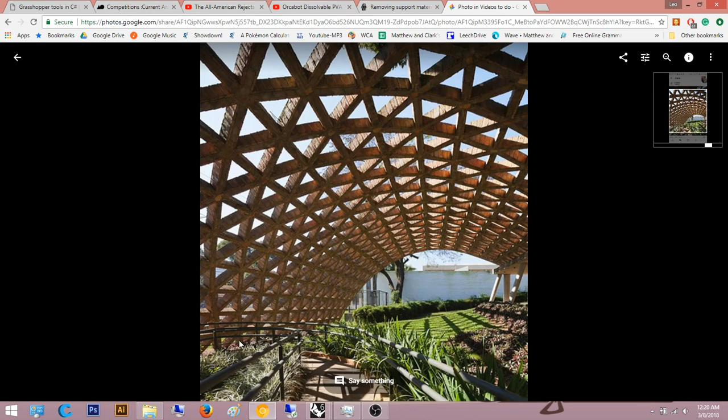So it's this, what's it called, a pavilion type structural member. I usually try to find some basic shape when I do parametrics. I know immediately this is a triangle, and from experience, a bunch of triangles creates a hexagon, and there's a hexagon or hexagonal command in Grasshopper. So I can use that as my base point, and now that I know that, I can start to model this.

Right, let me pull this up. All right, cool, so we're going to start with this. So I haven't even opened Grasshopper yet. Silly. So while this opens up, I'm going to talk a little bit more.

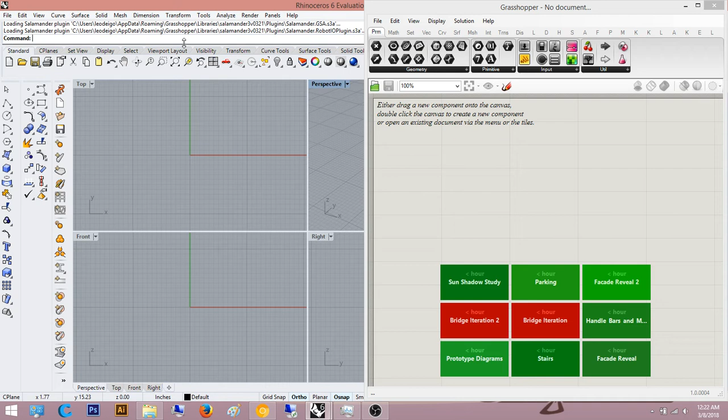Wow, that is out. So we're going to work in top view for this one, I think that'll work the best. What I'm going to do is work in a plane first, and then I can do a surface morph onto a surface I create in Rhino with this. So that's how I'm thinking about doing it. I'm going to have that picture up for reference.

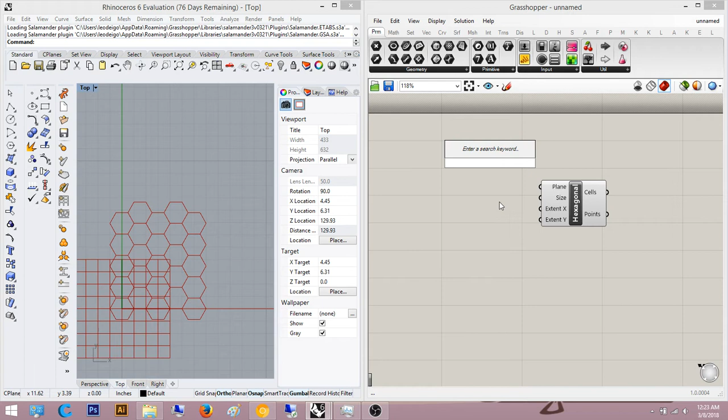So how I'm going to start off is the hexagonal, like I said. So we're going to start off with the hexagonal, so it creates this amount. I'm going to actually make it a little bigger, not the actual size, I'm going to make the size a little bigger. So 5 radius. There we go, and I'm going to add more of them, probably.

I always do 12 because if you type in, let's say 9, it'll only go up to 10. If you go 11, you can go up to 100. I always do 12 though because it's an even number, and I don't know why, it's just the easiest to pick out for me, maybe because my finger is already on the numpad, or I do 1, 2 instead of double clicking twice, so it just flows better. I don't know, personal preference.

Oh sorry, I just dropped my phone. I just hit it actually, sorry about that.

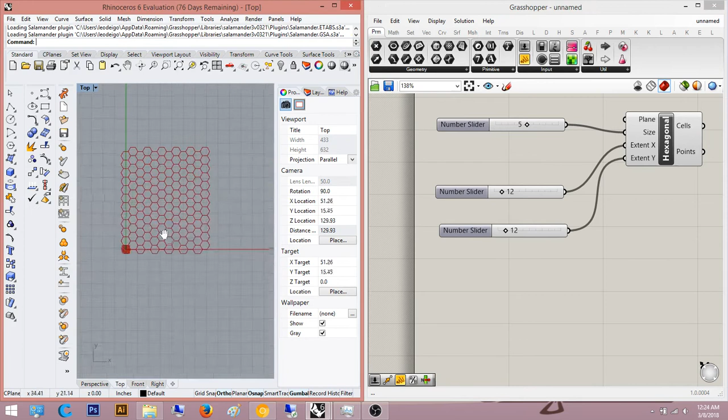So for extent X and extent Y, I'm going to put in 12 because I may want to change these up. Since the pavilion is a little bit longer this way, I'm going to make that a little longer. Alright, cool, so it's like a 20 by 13.

And now I am going to start with the grasshopper. So I'm going to do an explode immediately, exploding the cells, which is going to give me some segments and some vertices. What I'm going to do is use the vertices and draw lines that intersect this way, this, and this. So let's try that out, and probably the whole perimeter as well in general.

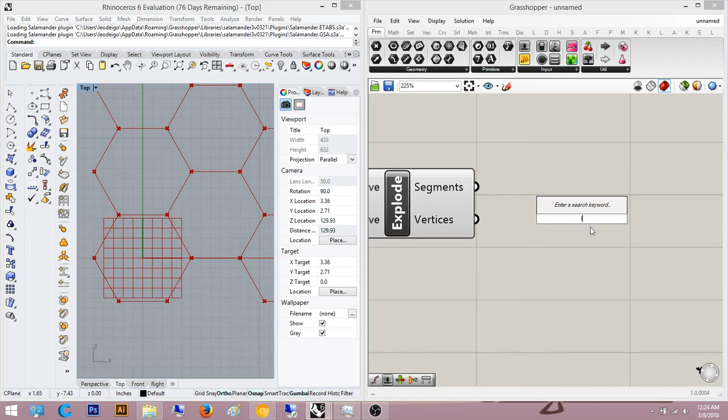So let's do a list item in general. I'm going to do a list item, and I do 1, 2, 3, 4, 5, 6 sides, so I'm going to copy and paste. Now if you're learning how to do this, I would recommend typing them all out. I know that seems stupid and redundant, but it helped me learn Grasshopper a lot easier just to understand the commands and how it works and get the hang of things.

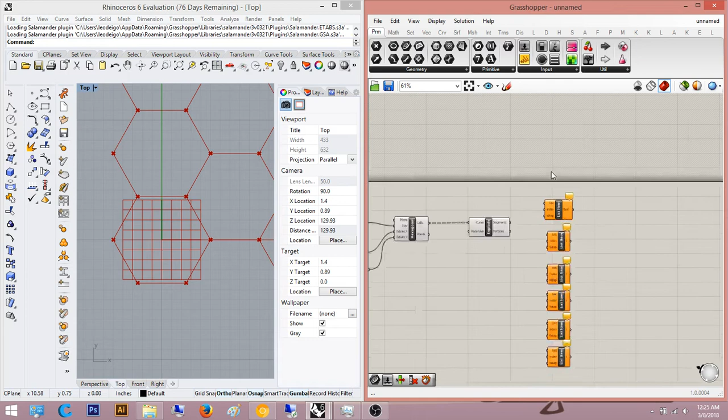So we're going to start with the segments and just throw up a list. Actually, before we do that, I noticed that if you have wires that are dashed, it means it's partitioned in some way, whether grafted or partitioned. If it's a wire like this, then it's not partitioned or grafted, it's just flattened basically. So this is partitioned into 12 or 13, whatever this number is, 13.

So let's do a list, and I'm going to throw all these in there. It's going to be 0 through 5 because 0 counts as a number: 0, 1, 2, 3, 4, 5.

Also want to apologize for the noise in the back. My 3D printer is running right now, so yep, sorry about that. So 0, 1, 2, 3, 4, 5.

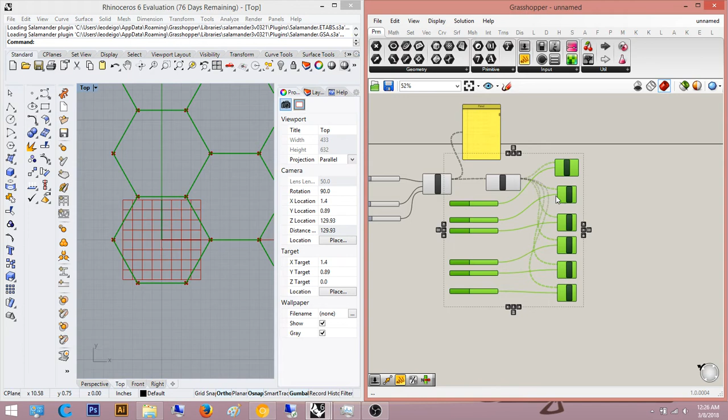Alright, so I like to keep my scripts pretty organized, at least it's a good habit to. So I'm going to group all these. So that is segments, and then now we're going to do the vertices.

So actually we can just copy and paste it again. So that's 6, I think. Yep, that's 6. I did it 6 times. So 1, 2 - oh, I plugged that one in the wrong one. Control Z. 1, 2, 3, 4, 5, and 6.

So then I'm going to align these, and then I'm going to use these same numbers here. Actually, I'm going to ungroup this. Oh, nope, I just double grouped it. If you right click, also if you want to ungroup something, you click on it, right click, ungroup.

Easy peasy. Take this, and I'm going to put this in the center of it, or around, and then I'm now going to group these 6 and these 6. Group. And I'm going to plug these in: 0, 1, 2, 3, 4, and 5. Nice, alright.

So now that we have that done, now that we have all the points labeled and all the segments labeled, we can actually start to do the geometry for this. So the geometry is basically that triangular shape along with the actual edges of the hexagonal, or the hexagon, sorry.

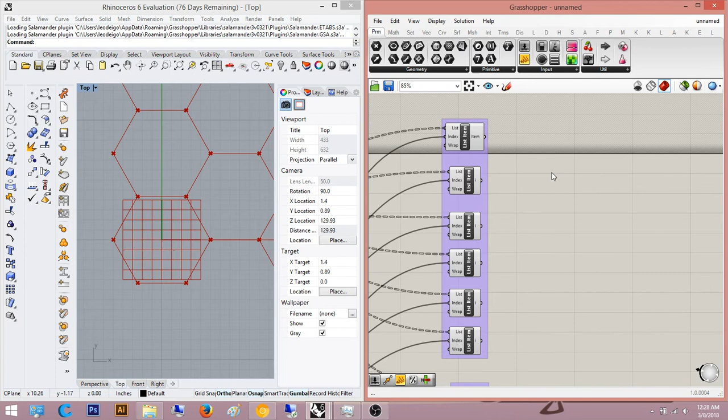So what I'm thinking of doing is I can technically join all these lines together and create my own - what is it called? My own sweep. That's what I'm thinking of doing, but there's definitely probably some better ways to do that.

Right now I'm probably going to take these points and draw a line first that intersect like this, and like this. That's step 1, I know I have to do that, so okay. So I know it's this point, this point. Okay, cool, so I have those already drawn.

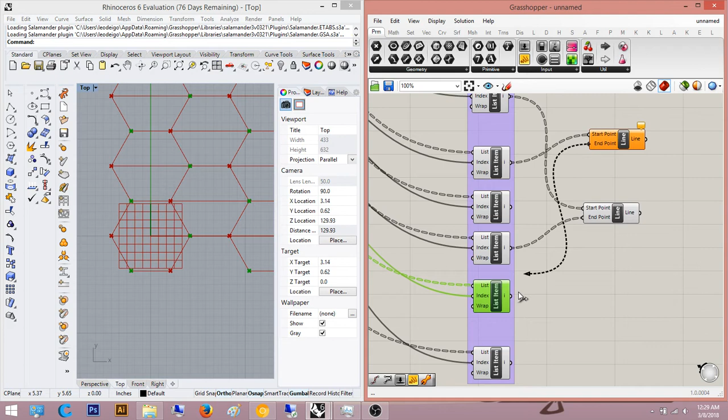And now next one, line. And for the sake of this, I'm going to copy this. Line one, and it should be this one. Yep, so this one. As you see, I'm just drawing - where's a clear example? Probably this top one. I'm just drawing a line that goes literally vertically, or straight across from one vertex to another.

Actually, I already copied it. So line, this point, and this point. So we have that kind of triad shape, as you can see from - oh wrong one, this one - from this one. So as you can see from this, I have those triad shapes now, or the triangular shapes.

So let me just straighten these out.

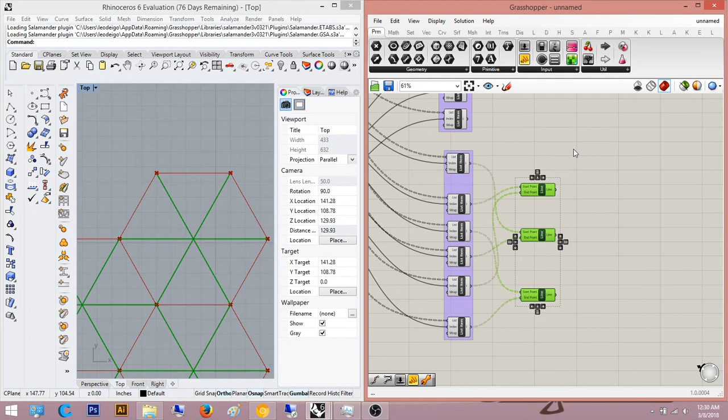And yes, you can see the clock, it is 12:30 a.m. I am up late. So what I'm thinking of doing here is I want to draw.

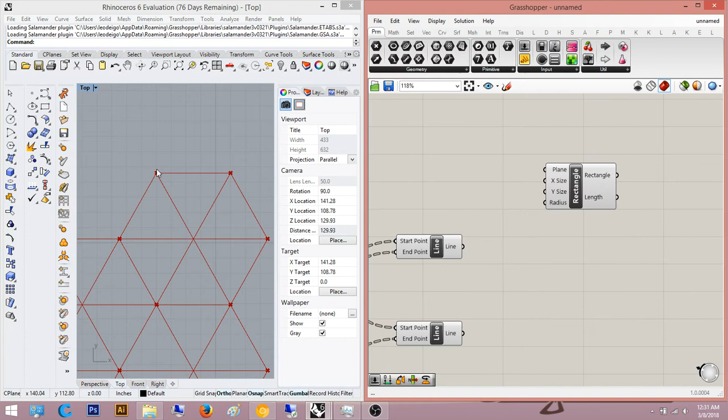Unfortunately, we can't just make a pipe and call it a day, it's super easy. What I'm thinking of doing is taking all of these and drawing some sort of rectilinear shape, a rectangle on a plane on one of these points, angled to it, so we can do a perp frame with the curve.

So we need the frame to fit perpendicularly with this curve, at parameter 1, which is the end of the curve. Yep, correct, awesome, that's exactly what I wanted. I don't even think I need to orient the geometry. Let me check in perspective. Nope, don't even need to orient it, that's perfect.

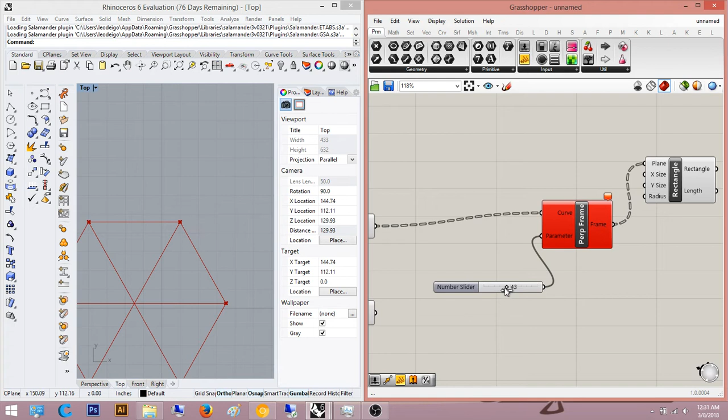Awesome, don't even need to orient it. So what I did here was I took this line and said make a perpendicular frame, make the frame perpendicular to this line. And it asked for a parameter, saying where do you want the rectangle to be. The parameters are from 0 to 1, 1 being the end of the curve and 0 being the start of the curve.

So you're supposed to set these to 1, range 1, and make it rational actually. Okay, so you can see the frame actually starts to move, and I added that rectangle.

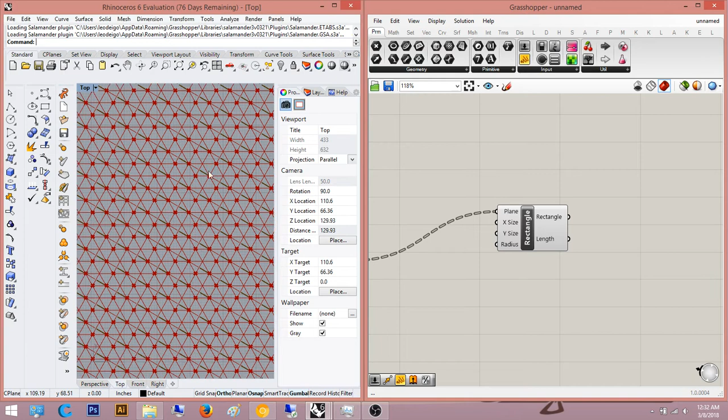But the problem with the rectangle is, if I say XY, it only reads as positive. So if you think of it as an axis, let's go back to Rhino. Why is it lagging so much? Jesus. Let's see what my memory's at. Oh, it's not terrible. So if you think about it as the axis, let's say these are your axes.

This is the positive axis. So if you say 3 feet, 3 by 2, it's going to do 3 by 2, not in the center of it. It's not going to be even 2 by 3 within the origin. So you're going to have to do a construct domain in order to create this rectilinear shape, a square in the center of it, almost a square piping. This is the way I've learned it at least.

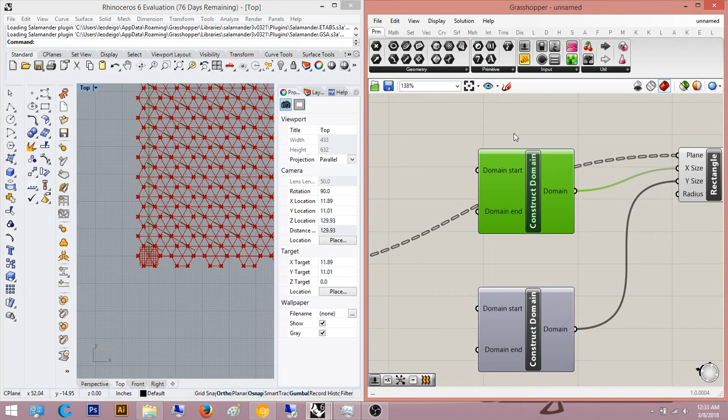So X, Y. So basically, when you do this... oh shoot, did it crash? No. Yep, it just did that.

I don't know why Rhino 6 does this. It's complete bullcrap, I don't know why it does this crap. Man, I was just trying to make a video. Wow, I guess that's part of the process. So, save your files, kids. I am not even going to go back to that. I'm actually going to go to Rhino 5 because, yeah, I'm pretty pissed off right now, I just wasted 30 minutes.

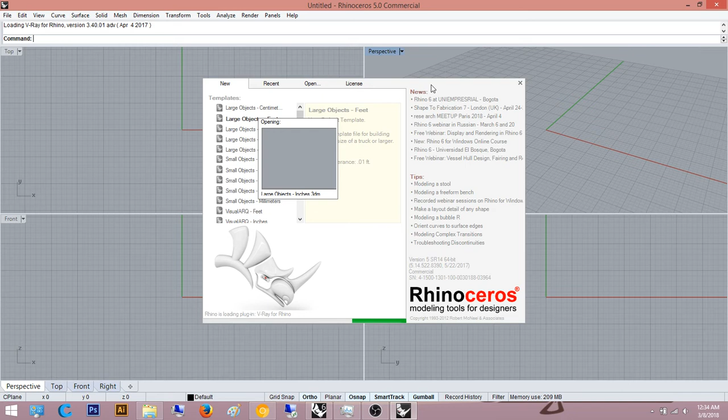I'm going to brush over briefly what I just did when I script it again, but I'm not going to go very in-depth because I already did for the first 30 minutes of this video. 30 minutes, was it? 15 minutes, no, it wasn't a big deal. Alright, cool, I only wasted 15 minutes of my life trying to record it and failing.

So I'm going to have to... man, it keeps coming up with this too. It's just not my day. Alright, close, nice. Alright, and now we can go to Grasshopper. So I'm going to use Rhino 5 Grasshopper, because Rhino 6 Grasshopper can't handle it for some reason. No clue why, just can't. I don't know, I can model in it.

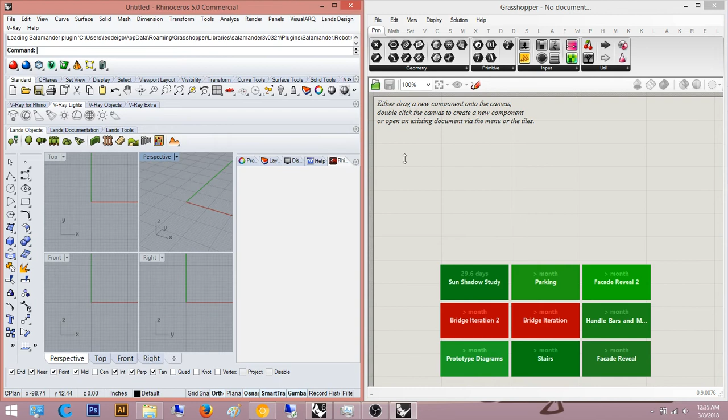I just can't do anything else. If I open up Grasshopper and start scripting, it just keeps crashing. I really don't know why it does that. So there we go, nice, nice, nice. Alright, cool. So we're going to do this again, let's try this one more time, ladies and gentlemen.

Hexagonal, and I'm actually going to type it all out, I think. 5. Copy and pasted that, it's just numbers. And I made this one a little larger. Right? Nope, made that a little larger. Yep, there we go.

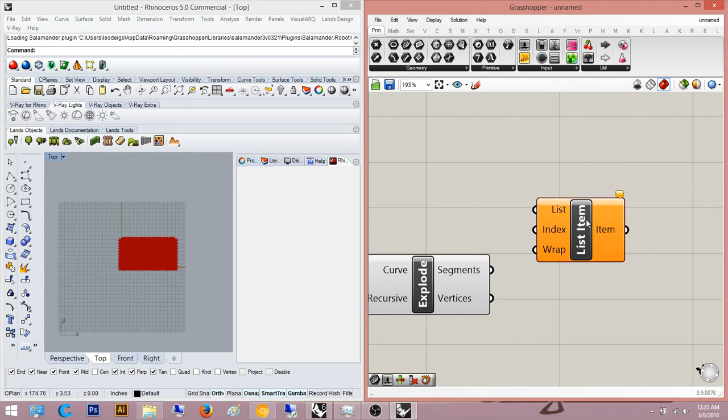And now I'm going to do an explode list item. One, two, three, yep, 6. Six of them.

Sorry about that, guys. I really can't help that. My computer happened to glitch out.

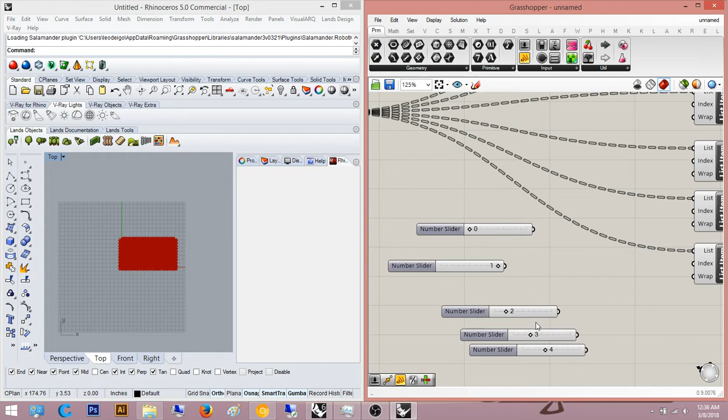I looked this up on the Rhino forums too. That's actually a problem when you use Grasshopper and Rhino 6. It just crashes, and I have no clue why. It just randomly crashes. That wasn't a heavy script either, so I'm very confused. It's just how it is, though.

No worries, though. I didn't get too far in the script, thank God. Maybe instead of plugging this in, I should have plugged this into another component, because I can't just do that. Save some time.

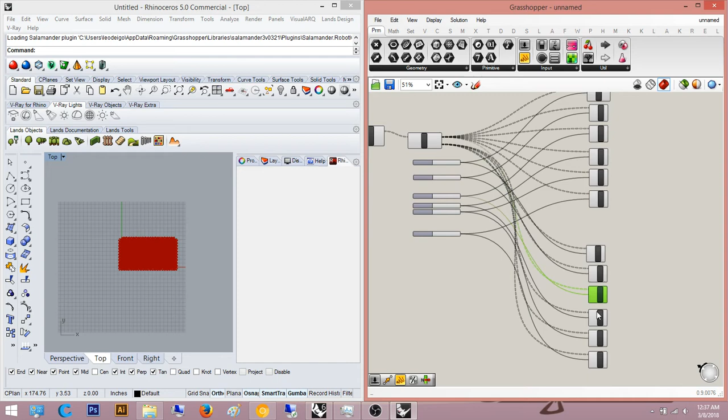Three, four, five, and six, amendo. There's still something plugged into there. What is it? Is it this one? This one? This one? It's this one. Alright, cool, they're all... alright, so we're back to square one-ish, kind of.

I still have to draw the lines. No big deal. I mean, it's a big deal, but whatever. Line.

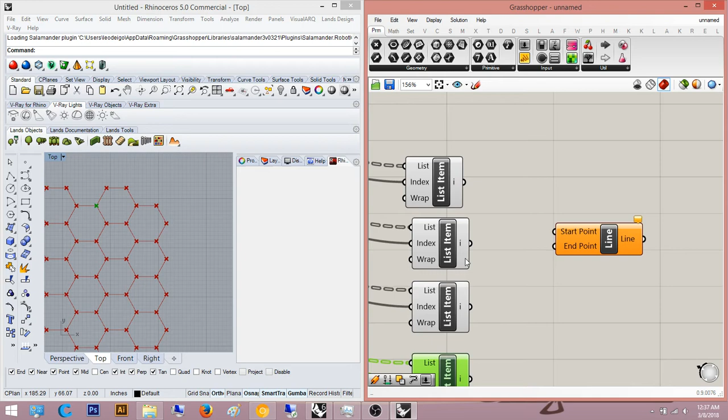So this point, or no, this one. This one, and this one. This one, and this one, and this one. And the last two, right here, right here. Nice.

Alright, so I started off here with a perpendicular frame, and this will create a frame within those lines I'm talking about. So we're going to actually use these ones, sorry. And the parameter starts from 0 to 1, so we're going to have to change it to rational.

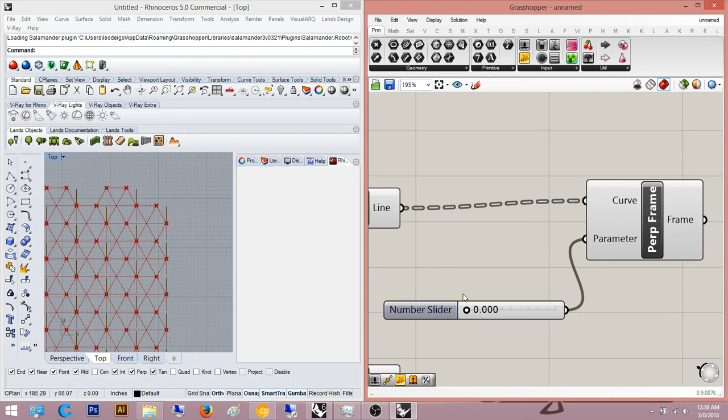Now, the reason why we're doing 0 and 1 is because the frames read - when I make a perpendicular frame, it's basically saying you have a curve, make the frame perpendicular to that curve. And Grasshopper's like, alright, I'll make that, but where am I going to make that? This is where you control where to make that. This will be like, I want the frame halfway, somewhere halfway in the curve to make that frame, and then you can start to make the geometry.

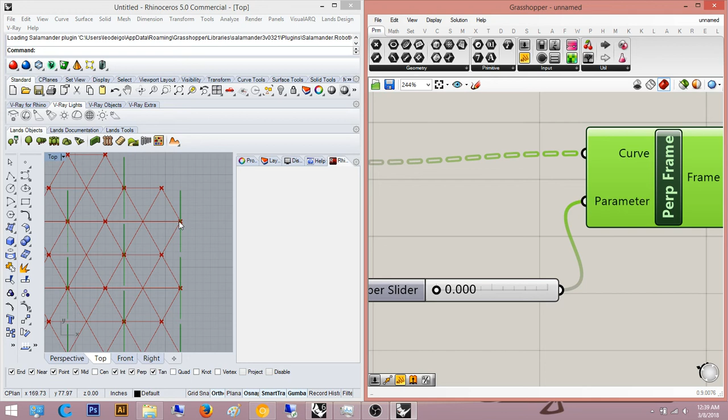I want mine at the end of the curve. You can also start at the very start of the curve, or do it at the very end. It goes from a 0 to 1 basis. So technically, whatever this distance is, it just kind of makes it into a division, like a percentage almost. So this is like 50% of the length of the curve, or things like that. Think of it like that. So I'm at 0%, which is the end of the curve, or the starting of the curve, if you want to think about it that way.

So we're going to do a rectangle, like I said before, and then what I was saying is to do a construct domain, because with how this XY works, it reads as positive. So it sees one locally defined value, -1 to 1, which means it is reading 2 technically, because it's reading -1 to 0 and 0 to 1. So that's a length of 1 plus 1, which is 2. So the length is 2 inches, or whatever your units are.

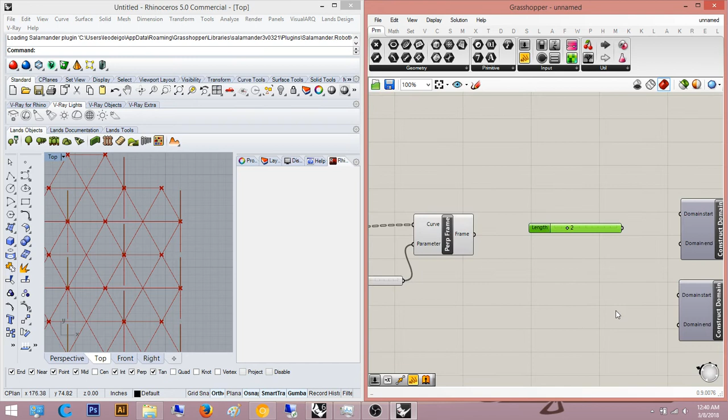So what I'm going to do is plug in a construct domain here, and we're going to make our own. So whatever this number is - let's say I want it to be 2, let's say I want the length to be 2. I'm going to actually name this length. And then I'm going to name this one width.

And then I'm going to save this file, and put this in our folder. Call it - we're going to call it Pavillion Facade. Cool name. So let's say this is my length I want it to be.

What we're going to have to do is some math and do a division, and divide this by 2. The reason why we're dividing by 2 is because technically, let's think about it.

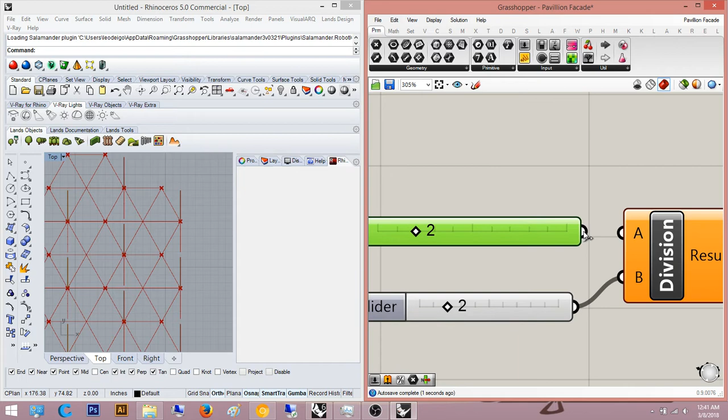Let's draw the rectangle in Rhino, like a quick one. So we have that rectangle in Rhino, right? So how is the rectangle reading off? Let me draw an example here. Let's say this is the axis it's reading off of. Actually, let's not use this rectangle, let's make another one. So right now it's reading the -1, 0 to 1. It looks something like this - let's say this is -1, 0, and then 1. I know these aren't proportional, but stay with me.

So when we plug in, let's say, just two positive numbers - let's say 3 or 4, or 4, yeah let's just say that. Or something like... come on. Say 4, 2.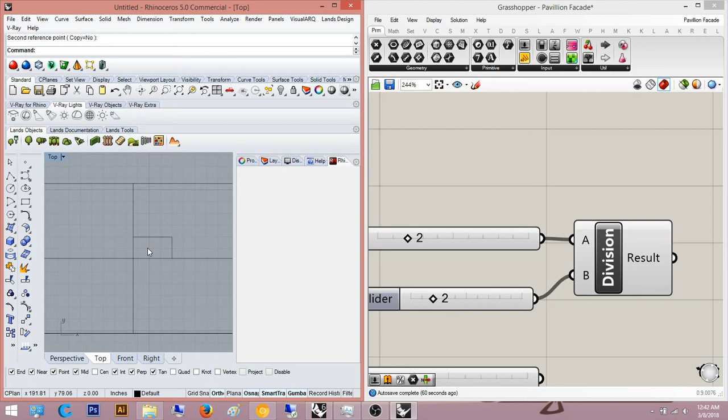So if we plug in 4, 2, it's going to be positive. Let's say this is our perpendicular frame, and I'll use 4, 2, so it's not in the center or origin of our frame, which is what we want. That's why we're doing a division here, so it'll be in the center, giving us -1 and 1. Or I can do 5, -5, and then 5, so it'll be 10.

So if I want the length to be 2, we always divide it by 2. Does that make sense? Let's think about it this way: if the total distance of this is 2...

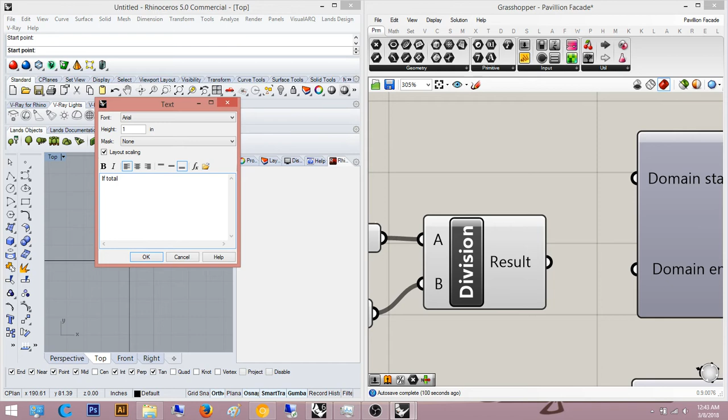Total... maybe I need a notepad open. That's crazy, I never use notepad.

So let's think about it this way. I want to make sure you guys understand this, because it's a weird concept, but it makes sense once you understand it. If the values given are locally defined at -1 to 1, that means the total length is 2, because of the distance of both lengths of 1.

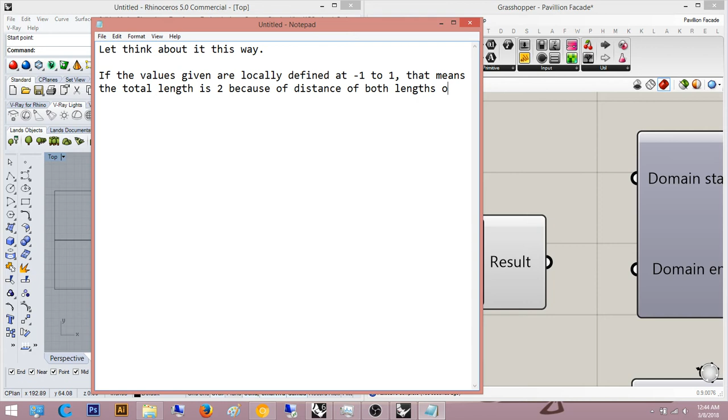It doesn't matter if there is a negative, because it is still a distance in world axis. What I mean by that is, this is -1, so technically you will always take the absolute value of those numbers to get the total length. Because if you think about it...

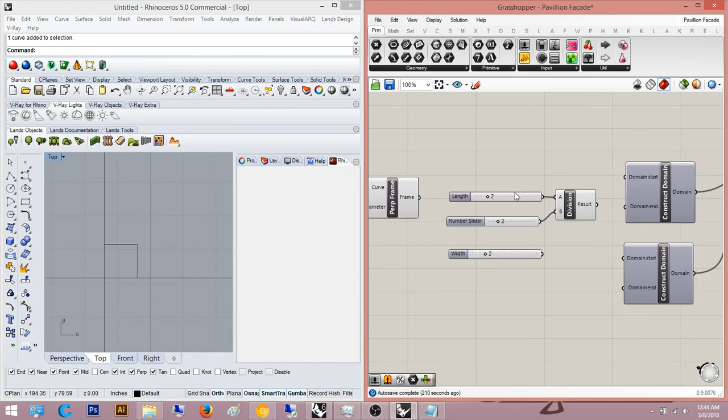Let's draw that rectangle, because this is 1. So if this is 1, let's say in Grasshopper I want a length of 1. What you're going to do is take a dimension of this, which is going to be half an inch. So what I want is this to be at 1. I know this isn't exactly in the origin either, so bear with me. Actually, you know what, we're making this perfect in origin. Let's say I want a 1 by 1 square.

So what we're saying the computer to do is take this side that I just snapped, and make it 0.5 inches. And then, as you see, it's already 0.5. Actually, let's make it 2 inches instead. So we already have 1 by 1, let's make it 2.

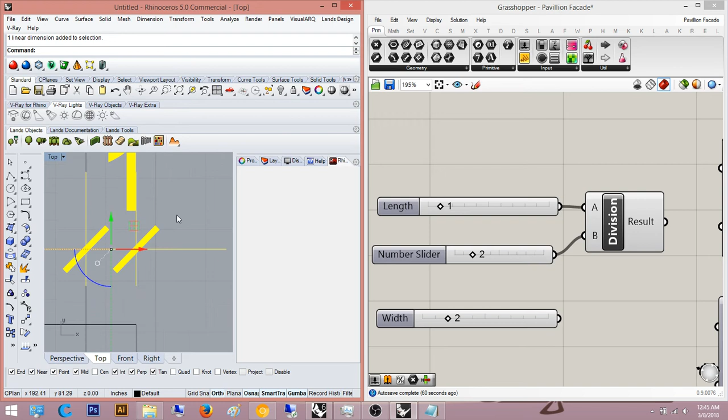So we're going to do 1 inch here, and then another 1 inch this way, and that will create our 2 by 2 square. And as you can see, each length of this is 1. So if we do a dimension real quick, we can easily see that this is 1. Yes, this is 1, so we can tell that this is 1 right here.

Because to get the length, if we go back to Grasshopper, we're going to do a 1. If we want, let's say 3, we divide it by 2 because we have to split it in half. So the total length here is 2, but we need to split it in half. So 2 divided by 2 is 1, and we're doing 3 divided by 2, which is 1.5. So we have to plug this into here.

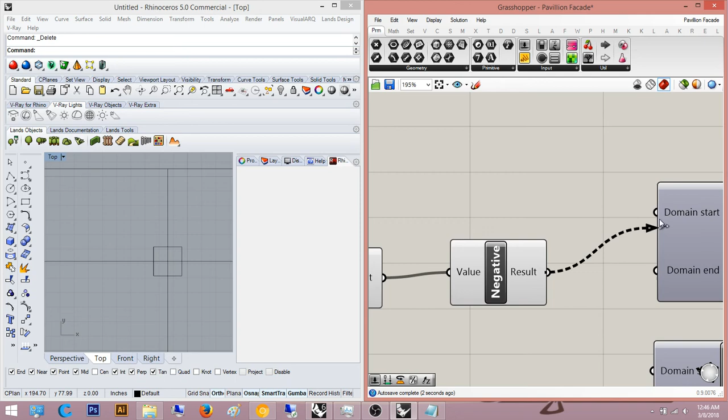So if we saw on there, it has to be a negative and a positive, because we eventually just take the absolute value of it. So if you do a negative component, we can plug the negative in here and plug this into here. And then we can plug the end domain into the positive. That will give you your rectangle that you're looking for, the x component, I mean. And of course, it's not even connected to the frame yet, but it will be, that's for sure. Then we can do another division component and plug this into here.

Let's say a 3 by 3 for right now. We throw in a negative, we throw in another negative, and then we're good. So now the only thing controlling is just the length and the width. Let's move these up here and straighten these out, so now we can parametrically control these. As you can see, it's a perfect square now, and I actually want it a little smaller - 1 by 1 should be fine. Now I want that plane to actually align with this perpendicular frame, which is what we created in the first place. Nice, nice, nice.

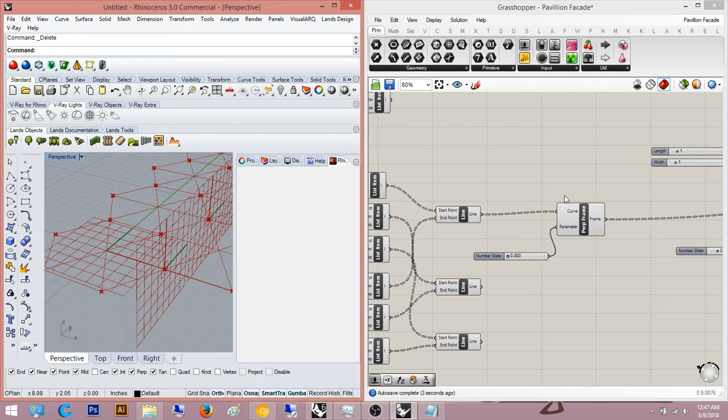So now with that, we can actually sweep this along that curve, kind of like a square pipe. So we can do a Sweep 1 - oh, that's a mesh sweep, Sweep 1. So it's asking for the rail, which is the curve we're going to basically make the pipe with, which is this line. So we plug that in. And it's asking for the sections - if we think about the sections, it's just the shape you want to, quote unquote, pipe.

It's cool that you can rename them. And it should make it. Nice, so it creates that. And they're pretty big, actually.

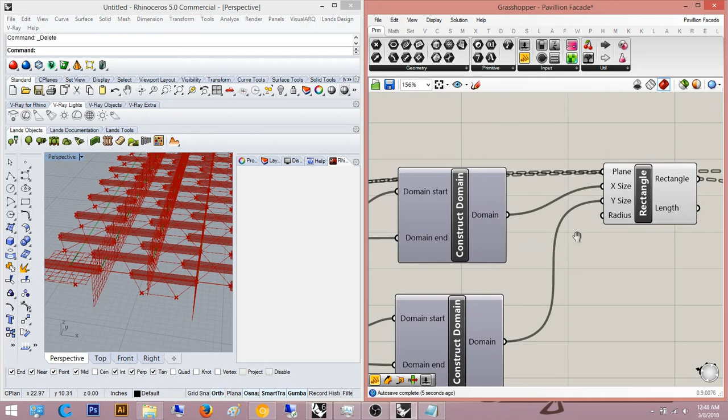Actually, I'm going to change the dimensions. This is huge, I didn't think how huge these would be. Rational, and we're going to make it rational.

And we're going to change these lengths to max 1, and max 1. Alright, sorry, and we're going to just kind of throw it back down a little bit. Nice.

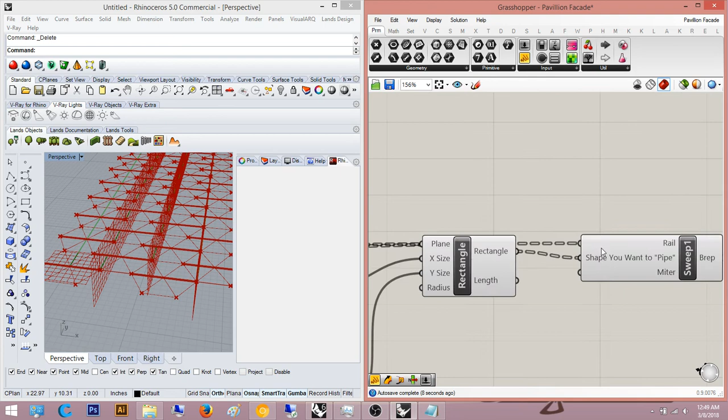Doesn't have to be a perfect square, obviously, for me. I just wanted to demonstrate how this works. So as you can see, it's clearly...

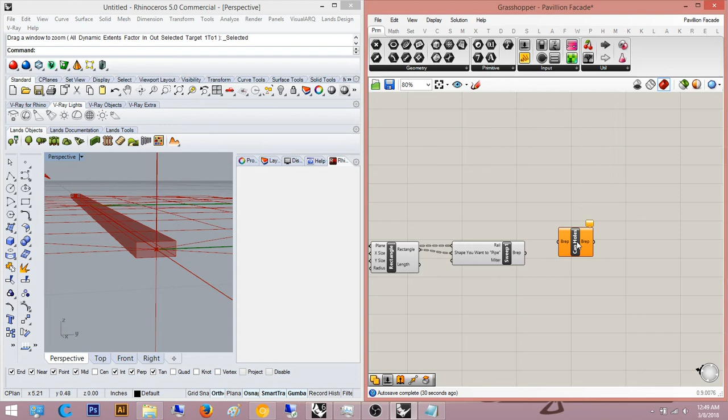So we're going to do that for the other 3 curves too as well. You can just copy and paste it if you want, but I'm going to type it one more time and explain it to you guys.

Perp frame, so we're going to make a perpendicular frame. We're going to throw the curve on here, and then we're going to make a parameter 0, because that's where we want it. We want it at the start of the curve.

Then we're going to draw a rectangle. No, not this one, rectangle. And we're going to do a construct domain and plug these 2 in.

Nicely done. And now we're going to do a number slider to determine our lengths. I'm probably just going to use the same ones here because I don't want to weirdly dimension it wrong. So we're going to do, oh, first we need a negative. I know that.

We can plug these in. That's it, plug these in. Division, we know we need a division symbol. And we know we need this to plug into here as well. And we're going to use the same values here. That one divided by 2, and divided by 2, and this one divided by 2.

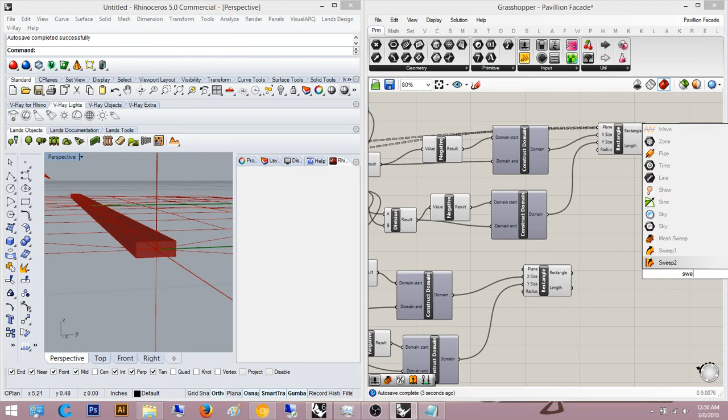Nicely done. And now we're going to do a sweep 1, and we're going to save. Rail. And we're actually going to add our frame because we forgot to do that already, or I forgot to do that, sorry. Sections. And let it load.

And do a cap holes. And as you can see, it's creating that geometry that we need. So we have 2 of them down, and now we need 1 more. And I like to turn off the frames, by the way, because they are really annoying after a while. There we go.

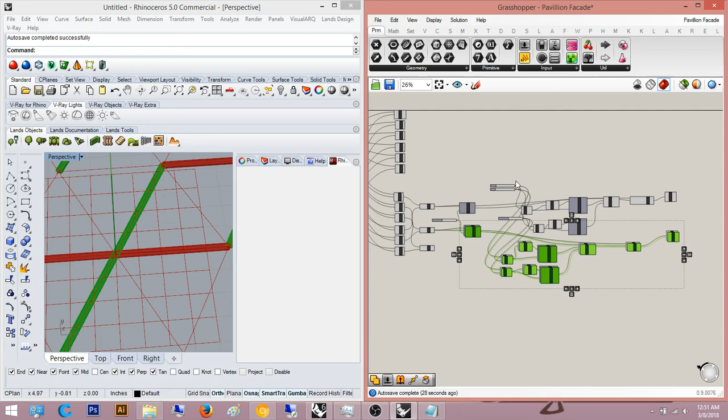And now we can do the last curve, and I'm just going to copy and paste this one because it is long. And it's going to literally be the same thing. Ooh, ooh, ah, don't lag now.

Uh-oh, I forgot to plug in this one. Plug in the rail here. Then it should work. Yep, there we go. And now it's working, cool. Awesome, sweet, now we can do that for the other ones.

Technically, we can do a... for this one we can just polyline, I'm assuming. I know we exploded it and then we did this, but I think it's better if we just polyline this.

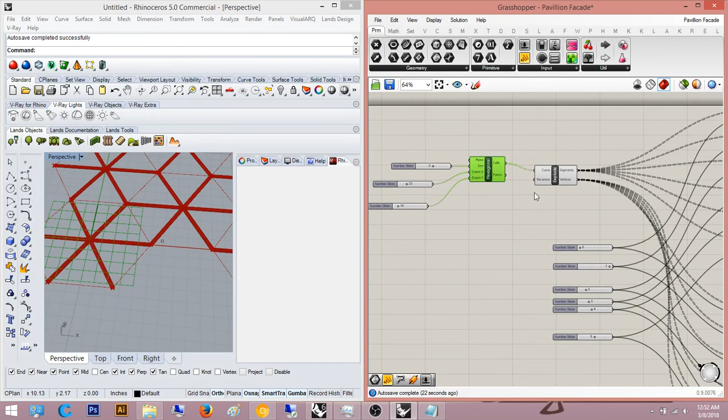Oh wait, hold on, these aren't points, these are segments. I'm bad, we can use the curves. I mean, we could use the curves, or we can do... thinking, if we could use the curves, or we could use the...

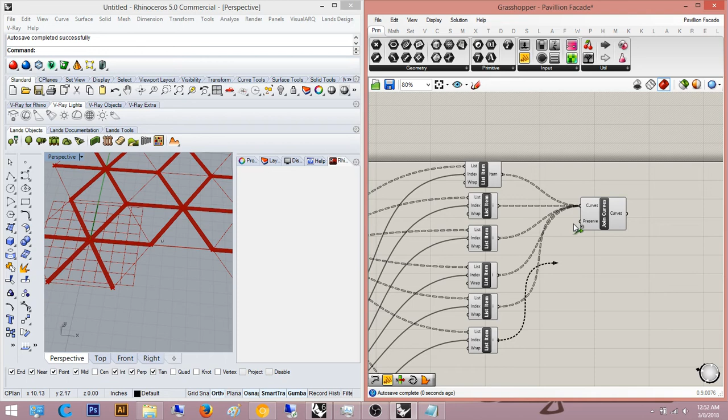Let me try this, and then what I'm thinking is I'm going to do endpoints. I guess the endpoints are in the same place. So... okay, so I think they're in the same spot. So maybe I will use the points and just do that.

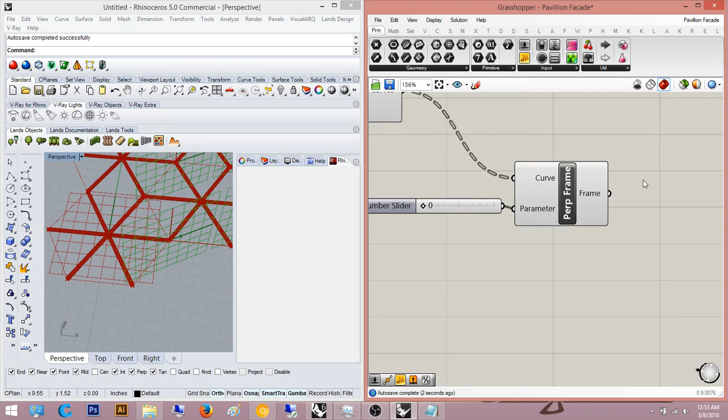Let me try this way. I'm going to do another perp frame. Join curves. 0. Cool. Do another rectangle. XY plane.

Just do negative again.

One second, guys, let me check on something. Sorry about that, I had to check on my print, just making sure it's fine. Whew, it's hard to sleep with that thing on, just letting you know.

But I'm getting used to it, so we're going to throw in a division again. It's just the same stuff too, because we're going to use the same dimensions, and then we're going to divide it by 2.

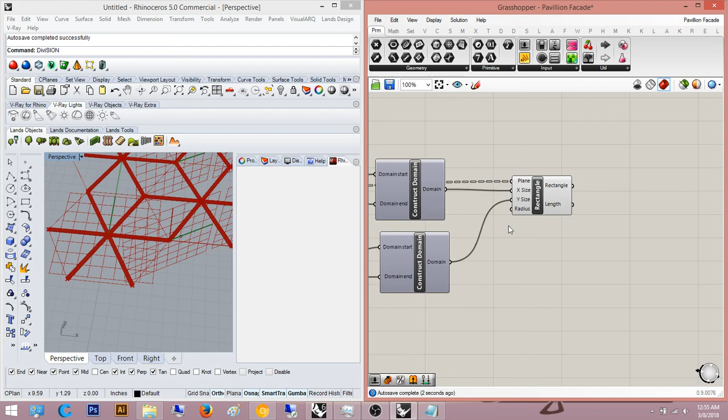And then we're going to plug these in, and do a sweep again. Before we do that, sweep is a bit of a heavy command, so I like to save before it. And then it doesn't... it's a rectangle, so I don't know why. You know what, never mind.

So we do a rail, which is the join curves, and then we do the rectangle. And it says why is it not working? Sweep cannot be created. Well, what a douche—no, I'm just joking, I'm not a douche. It's a closed curve, I think that's why it's freaking out.

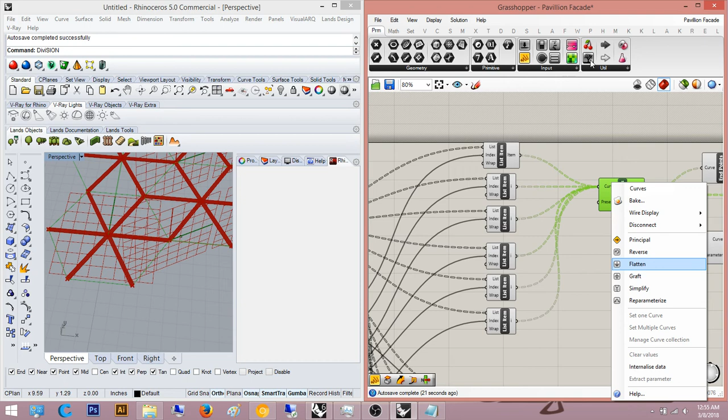Let me disconnect one of them. Let's disconnect—oh, you guys can't see that, sorry, I was showing up on my other screen. If I disconnect that, it should make it 5 of them, not the 6th one. Yeah, it's not responding. Please respond. Don't send me an error report.

Yep, okay, it worked, nice nice it worked. Yay, everybody clap their hands—no, I'm just joking. So this curve is what we need to do.

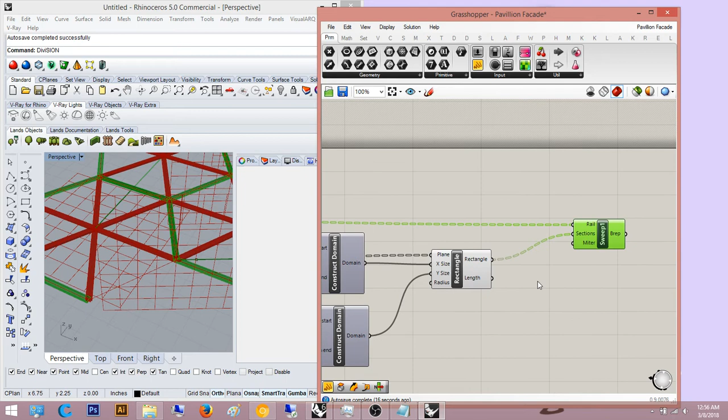We can actually plug in the endpoints for this one real quickly so we can see our endpoints. We have to do this one separately because the sweep doesn't work well with closed curves. Don't know why, it just doesn't. It's just a giant pain with that. As you can see, this one created the sweep nicely.

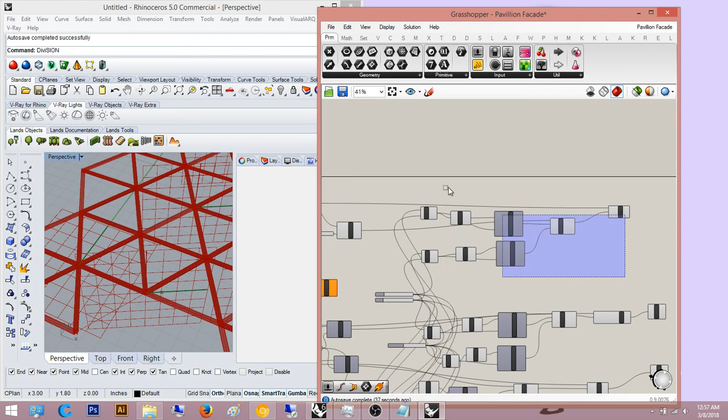And now we can take the geometry we have. You can also do a perp frame. Okay, there's just a lot of stuff and I have to move it a lot.

Can I just copy and paste this? Is that possible? It's just the sweep 1, and this join curves, and then the perp frame. Yeah, I'm just going to copy and paste this, I already have it.

Again, if you guys are learning this, I'd recommend typing it. I usually do it when I'm learning something new, I like to type it out a bunch and understand it. I guess I am learning this script, but I know what it does. You have to understand the importance and how the script works before you start to just copy and paste it, in my opinion. Maybe I'm wrong and a bit of a hypocrite.

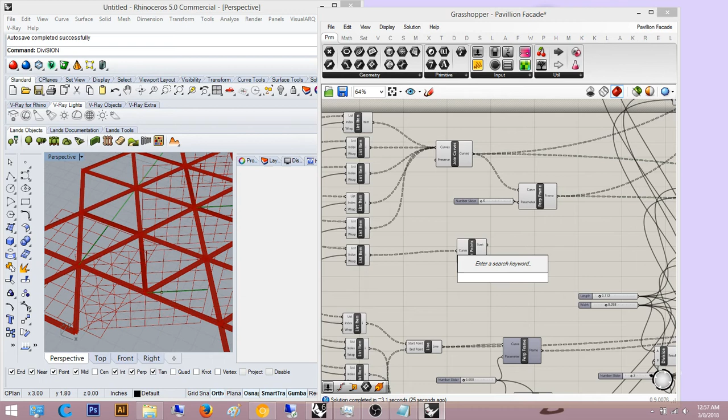Perp frames. Plug this in here, put this in 0. I'm going to put this in here first. Yeah, sweep cannot be created. Oh wait, wrong one, wrong curve. It's going to crash again because I put in the same one.

Whew, it's 12:58, guys, it's been a while. That's for sure. It's been, how long? 39 minutes. So come on, come on, come on. It's a bit of a journey, I would say.

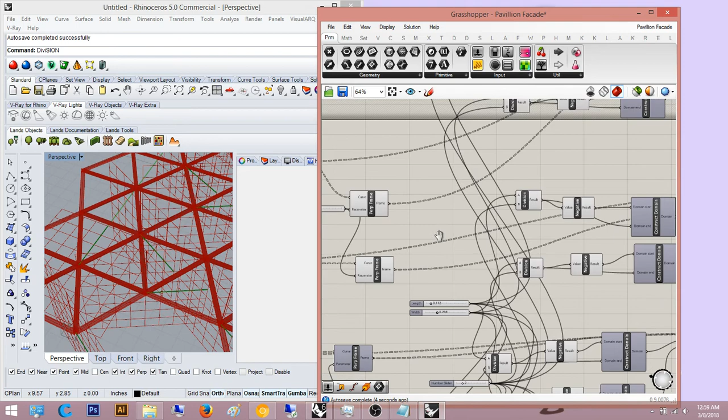So I'm going to plug this in here. Hopefully it doesn't crash, because I'll freak out if it does. Oh, it didn't freak out. Cool, nice, we're going to use this frame. That's the only thing I'm missing. Alright, nice, it created that last one right here.

So now we have all of our sweeps. If we highlight all of them, we have our sweep, so we basically have the framing of it. I don't have it like super thick like they do, but I do have that type of geometry that they have, and that's what's important in my opinion.

Sorry, one sec guys, I'm just making sure I get this script correct. Alright, cool, and now—oh, I forgot to cap it. I forgot to cap these. Cap holes. Alright, so now we're going to have to do the surface morph, which is something I'm unfamiliar with.

I've only done it once because I was testing it out and seeing how it worked, and it's really cool, but I'm not an expert at this.

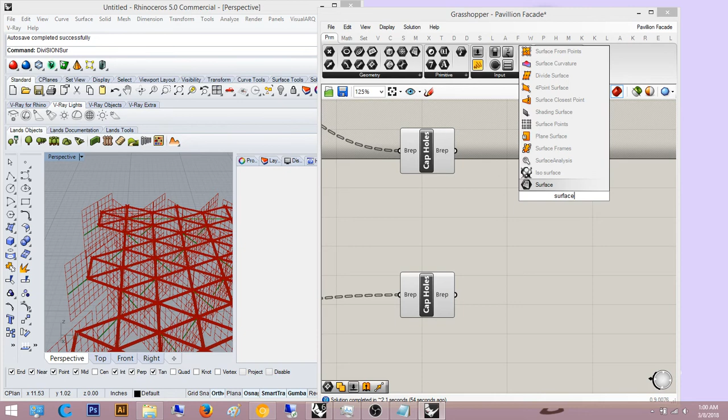So I'm going to do a surface—ah crap, I keep typing that—surface morph. That's all here. Ooh, oh boy. So the geometry is the geometry to deform. I'm going to start with the framing of it, which is the easiest one. So, like this. No.

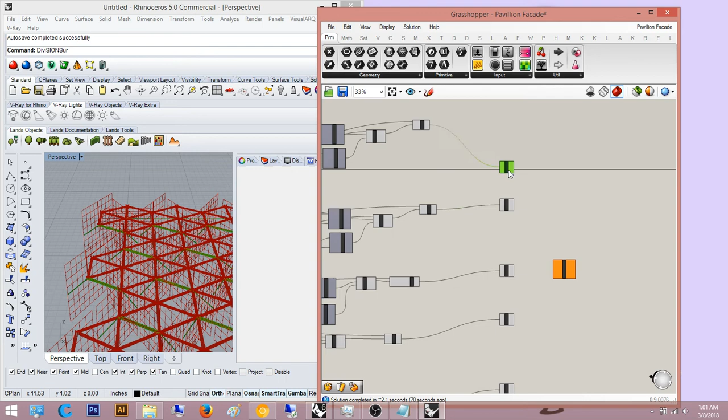Whoa, is that the framing of it? I can't see it, it's not on top view. Alright yeah, these two are it.

So I'm going to do a merge here, because I don't want to keep plugging crap in constantly. I like to use a merge sometimes to make things easier, and sometimes merging actually helps on the listing.

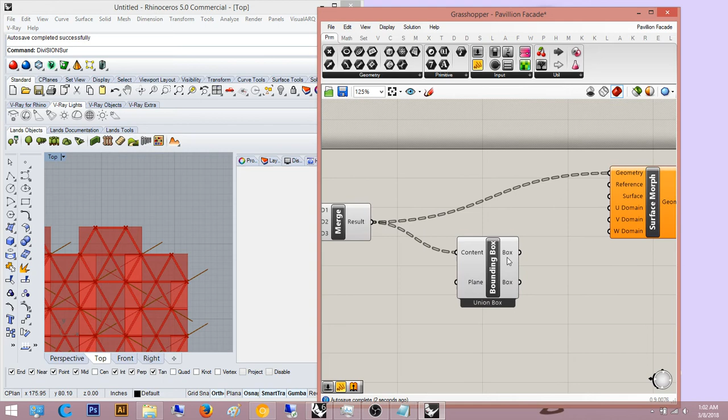Rotate this up with ortho, and move vertical. Loft. And there we go, so put this in shaded, not pen, shaded.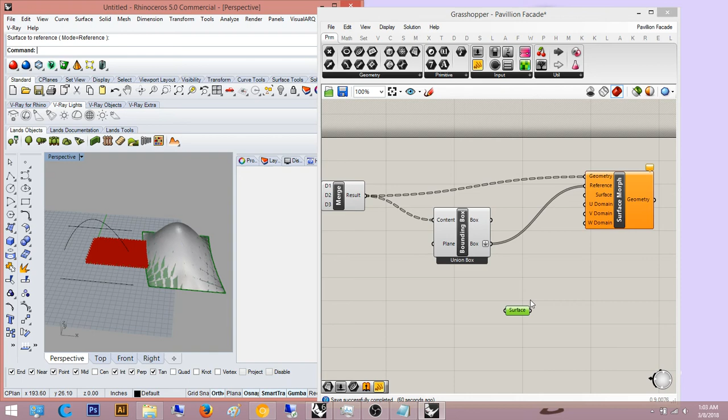Nice, so that's what I want, that's the surface I'm going to reference in Grasshopper. So go back to Grasshopper, surface, right click, set one surface. Nice, and then we're going to plug in our surface and pray this works.

Input parameter UV value. Okay, I don't have any empty domain. Alright, so it's not horrible. So I'm going to say 12, I'm going to start out with 12 for each one. I don't know.

Alright, so it's loading, it's not responding. That means it's bad. Maybe that was a very big number, maybe 12 is too big, I don't know.

So I think the reference box is the only thing I could have done wrong, that's the only thing I could think of that I did wrong with that. But I don't know exactly right now because I can't move it and it's not working and it's crashing probably. All I can do is let it load.

But anyways, I know that I've used Surface Morph before on other objects, and I'm probably going to do a tutorial on Surface Morph solely because it's such an interesting component of Grasshopper that I think is not talked about a lot. So once I learn a little bit more about it, I'm definitely going to do a video on it, and I think it's a really interesting component, and I really want to learn it.

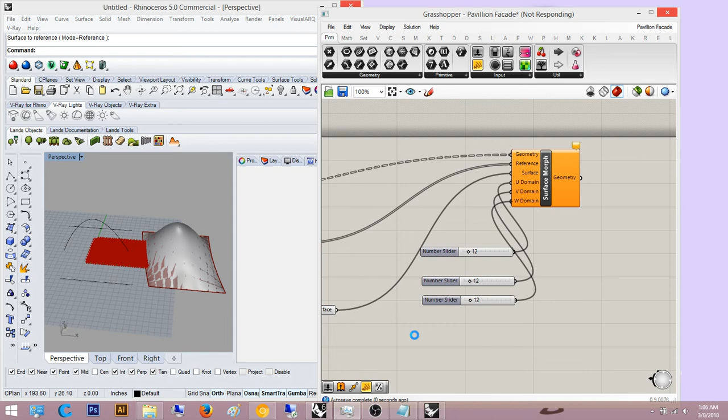Crud, alright so it's just a lot of geometry, and there's my notepad. So I already saved that, thank God, I didn't just leave it unnamed like last time. Sorry this video is all over the place. That's kind of, I feel like, the point of this video, for me to mess up a bunch and show you guys what not to do.

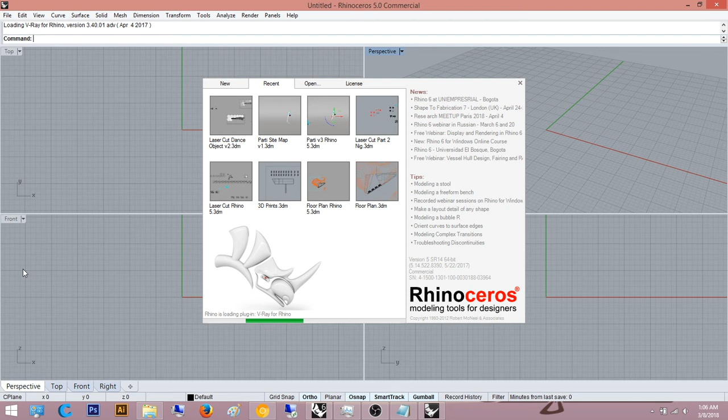So this is supposed to be very informative and understanding like the workings of Grasshopper almost, or not the whole thing, but just like the process of actually modeling in it and like the mindset. And when I go online and I look at other people's tutorials, it looks like they know everything, which is great and all, but that doesn't teach me anything, in my opinion.

And thank God it did a recovery save. Nice, and now I think about it, oh it didn't even save my surface. No, my surface. Alright, you know what, we're going to make our own surface again.

Now why is there like 5 perspective views? What the hell, hide tab. No, show tab. Well, I don't need it. But, oh man, I use those a lot actually, I didn't even realize how many times I use it. It's fine, and that.

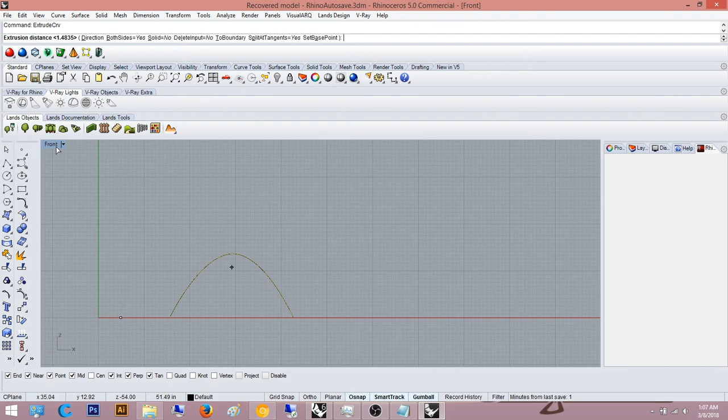Let's just do an extrude actually, that's what I'm thinking. I'm thinking just do an extrude. Where is show?

I'm actually going to save this file under the same component. Where is kinetic architecture? So what is it? Pavilion facade.

Ooh, it is 1:08, guys. I'm letting you know it is a late night as usual. So let's open up Grasshopper again, see what goodies I get.

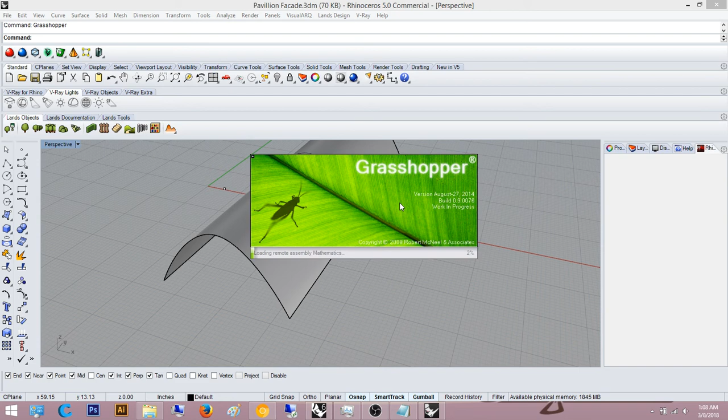Alright, so now let's see. You know what, this never works, by the way. This autosave crap never works. I don't know why. Open document.

What is it, pavilion facade? I have a lot, so have I done that many videos? Pavilion facade, okay, there we go.

Open recovery file. I hope it's not that giant script. I hope it's not the one saved with the Surface Morph. I'm going to open up a can of worms over this one. Maybe it is. Crap.

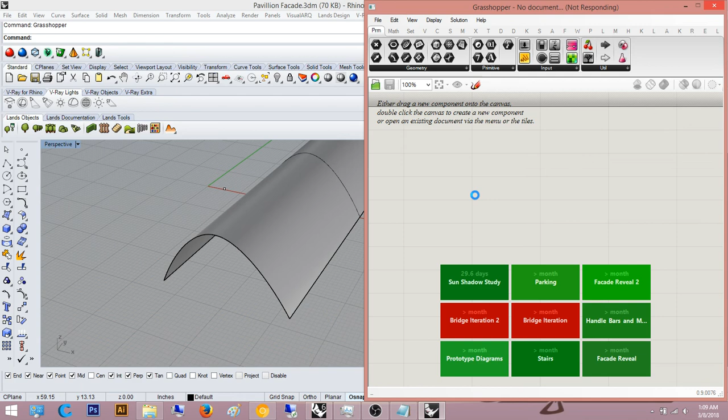Let's see if this works. Let's pray, I don't know what just happened. Oh, Grasshopper disappeared. Usually when it does that, it keeps loading, and I don't know why.

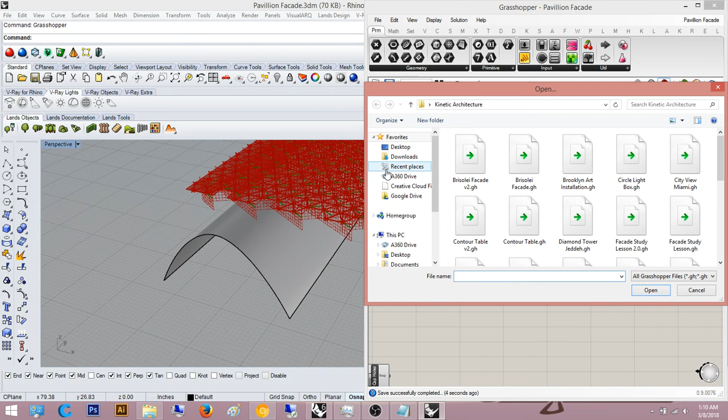I am not plugging in those 12s again, I'm putting these at like 1. This will be like 1. And we're saving this bad boy. I'm also going to open up my template files just to show you guys my process, because that is part of my process. If I don't know something, I look back.

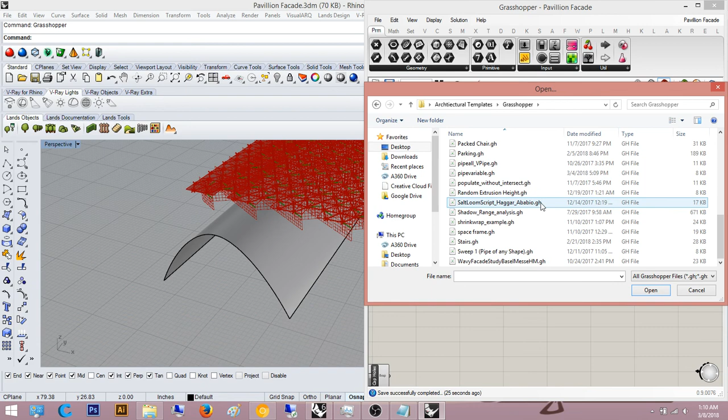It should be named Surface Morph on here. I'm almost sure - that's shrink wrap, not the same. Packed Chair, Parking, I guess I don't have one. Wow, for me I just don't have one. I've used it before, I just don't remember how I did it. So time to learn again.

I don't know what the difference between aligned bounding box and coordinates is. Oh, that's the bounding actual box. Reference box to map. Okay, so I'm going to use this geometry. I'm going to use this geometry. Set one surface, let's save.

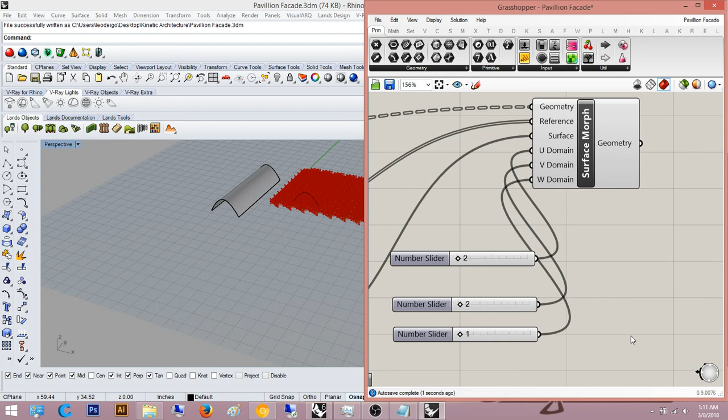Let's save. And plug in the 1. Oh, so it didn't glitch out, that's nice to know. Didn't freak out. Alright, and I think I need to flatten this.

Nope, don't flatten that, that's for sure. Oh, I didn't even set the surface, no wonder it didn't make sense. Alright, why is it not setting my surface? Set one surface. Surface to reference, you dick. Okay.

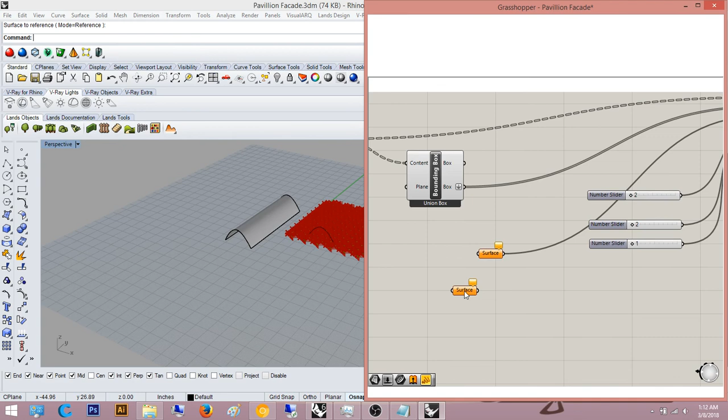You know what, I'm going to type in a new one, and I'm going to reference it. It's just not referencing this. I don't know why. Why? Reference, please. I don't know why it's not referencing that. That's really weird, I've never had that before.

Let me try lofting these. This is a surface right here. Maybe it just doesn't like extruded geometry, but that still doesn't make sense to me. Alright, that reference, because it's... 1, 2... Alright, so I referenced that geometry. Let's see if this works.

It's just in the void again. Maybe it'll work this time. I think it's just a ton of geometry. Maybe if I shorten down the amount of hexagons I have, it'll be easier, so maybe I'll do that. I'm going to try that to see if that works. That's the only way I think this will work right now, because my computer is just not feeling it today, that's for sure.